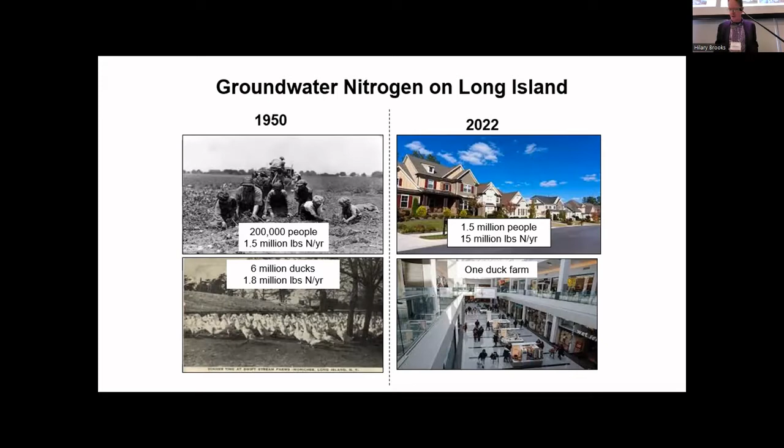But with people, it's a direct injection method through cesspools directly into our drinking water. You can see the bottom chart on the lower left, about half of the nitrogen that's reaching the watersheds is from the cesspool. Over on the right, it shows over the 30-year period up to 2017 dramatic increases in the nitrogen or nitrate concentrations in our upper glacial and Magothy aquifers, which doubled over that period.

The thing is that those are averages. There are places, if you read the Suffolk County Subwatersheds plan, that are getting 10 milligrams of nitrogen in water. Why is this important? 10 milligrams happens to be the EPA limit.

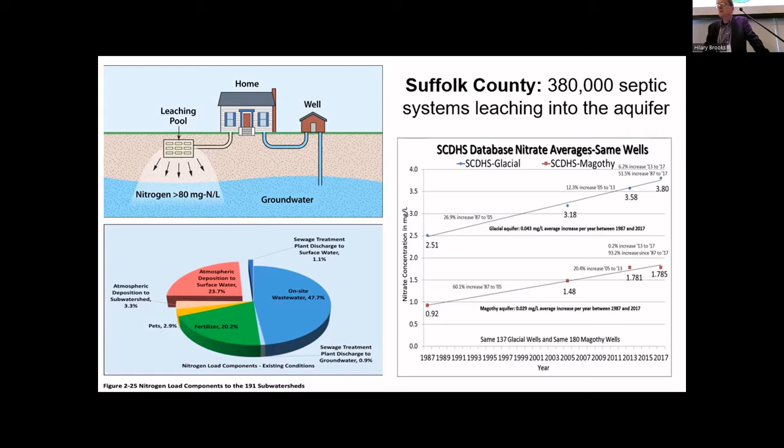But there have been a number, Chris and I were having a conversation about the other day, we thought 20 articles in the last two decades of epidemiological studies that correlate drinking water nitrate and serious illnesses like premature birth, colorectal cancers and other cancers. But the important thing is this is at 3 milligrams per liter, not 10.

And I'm sure just about everybody in this room also knows that when that nitrogen-rich groundwater discharges into lakes and estuaries, marine systems, there's a cascade of environmental problems.

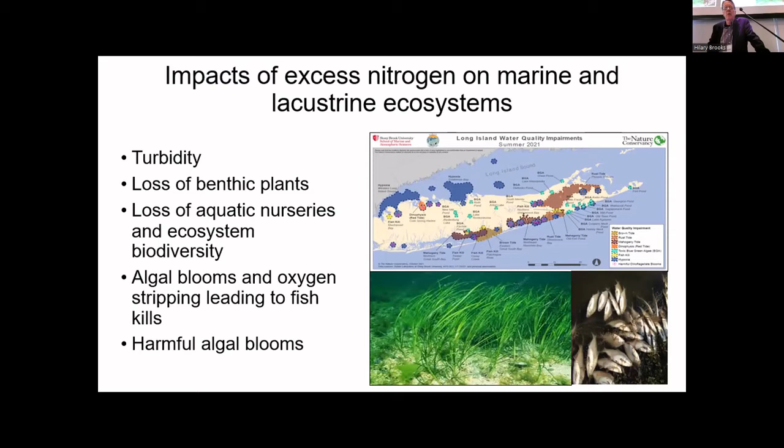Nitrate fertilizes the estuaries and the lakes, resulting in a turbid water column, which leads to a loss of light and loss of benthic plants, which provide nurseries for the ecosystem there, and that leads to a crash in biodiversity. Algal blooms strip the water of oxygen, nitrogen hits fish gills, and fish are facing the wrong way because they're dead. And harmful algal blooms, which Chris has studied over the last decades.

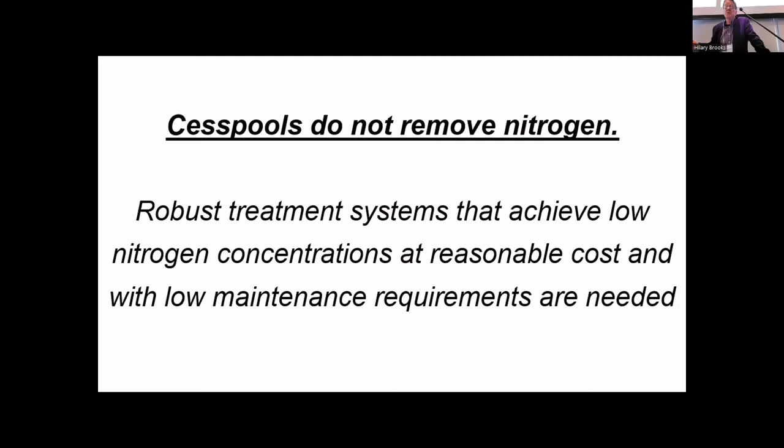So cesspools do not remove nitrogen. What is needed is robust systems that achieve low nitrogen concentrations at reasonable cost and without high maintenance requirements. At the center, all of our technologies revolve around the basic principle of coupled nitrification-denitrification.

Now, this occurs naturally in the environment. It occurs in sediments of continental shelves, estuaries, and it occurs in soils and forests. Basically, it's the coupling of the oxidized form of nitrogen, which is nitrate, which is then denitrified into basically air, into dinitrogen gas. Our systems just speed up that process happening.

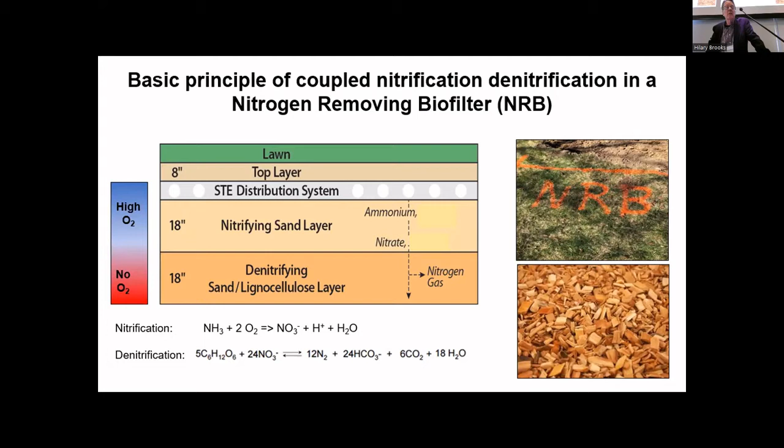So we deliver wastewater through a distribution system over underlined 18 inches of sand, which oxidizes the reduced forms of nitrogen into nitrate, and then in an anoxic layer, it's denitrified into air. There are basically three designs that we use. This one is the unlined NRB, and that one is direct final discharge into groundwater.

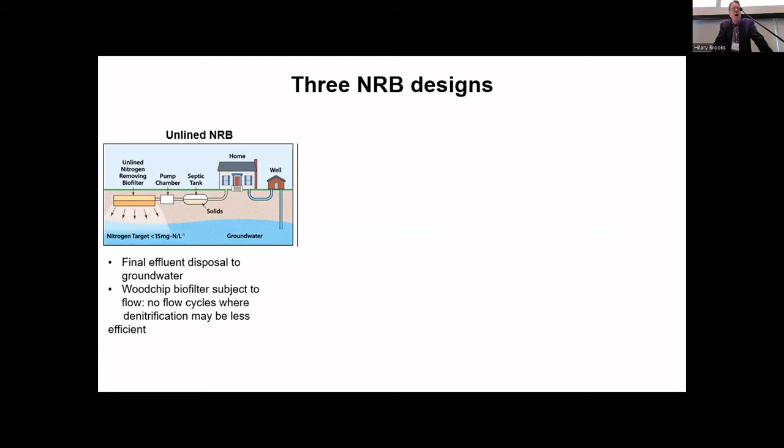Again, it works with a septic tank that is pumped into the drain field, 18 inches of sand, 18 inches of sand and wood chips. It's unlined, and so wood chips in this configuration are subject to cycles of wet and less wet. In that system, the wood chips aren't thoroughly anoxic all the time. For that one, we actually target final effluent nitrate of about 15 milligrams per liter.

The second system attempts to address this problem by putting a liner around the system and running a pipe from the bottom of the system. Wastewater is channeled up through that pipe to the interface between the sand and wood chips, and that creates a hydraulic head so that the wood chips remain continuously saturated and therefore anoxic, allowing better denitrification.

And the third design takes the sand portion, that is the nitrification oxidizing portion, and channels the water down into a wood chip box. In that box, there's a much greater volume of wood chips and much greater surface area of wood chips, so it really enhances the denitrification.

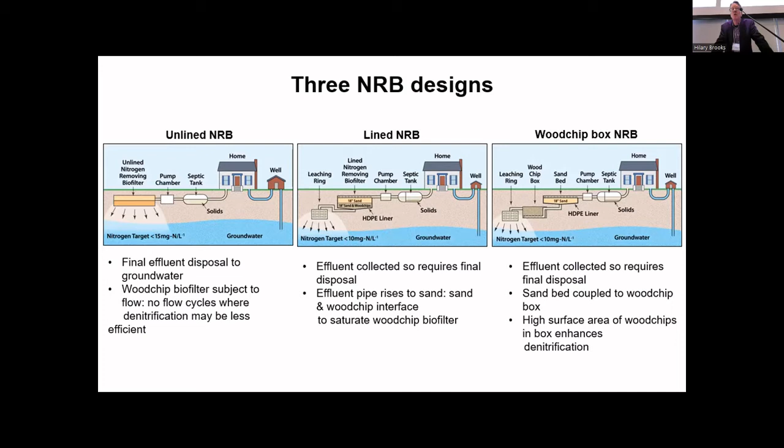Both of those second systems aim for 10 milligrams of nitrogen. How have they been doing? Well, to assess that, we decided to fast forward the tests for these systems, the Article 19 tests, and assume that the data at the end of last month was final.

What you can see is that the unlined systems get about 15.4. 5 out of 8 of those systems are getting better than 19 milligrams per liter. The second system, our lined system right now, averages 7.5. I expect that to drift up a little bit in the next few months. That's pretty good right now. 6 out of 8 of those are getting better than 19.

The wood chip box systems are getting 14. Now, that total nitrogen in final effluent is higher than lined, but it's because those three systems happen to have very high levels of nitrogen in the influent, about 120 to 135. So they're reducing about 87%, just about all of that. The other two are somewhat less efficient, but still handle up to about 100 for the lined.

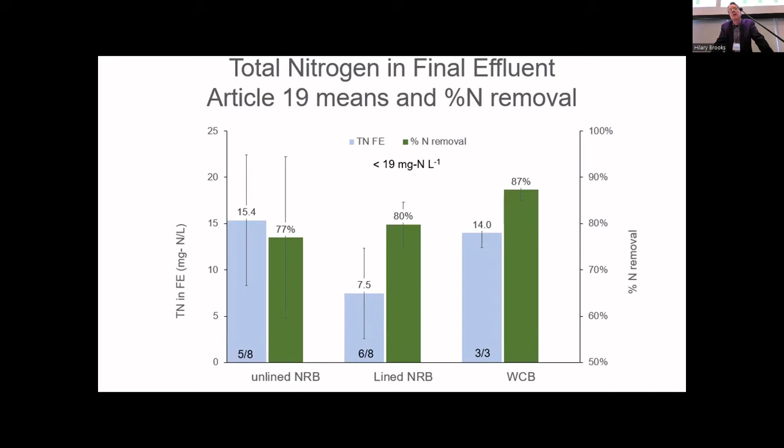So how do they compare against commercial systems? They're okay, they reduce nitrogen pretty well. But on-site wastewater contains more than nitrogen, it contains emerging contaminants.

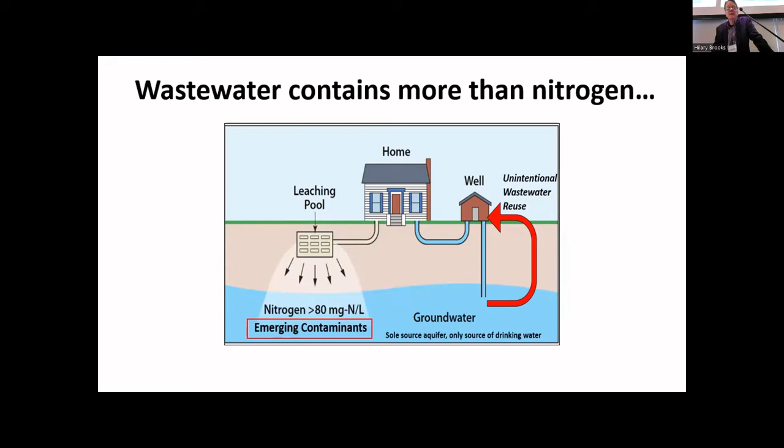Our drinking water team here at the center did a study over a year ago where we looked at how these systems remove 1,4-dioxane. They reduce it by about, in some cases, up to 8 times, down to less than the New York drinking water standard of 1 ppb.

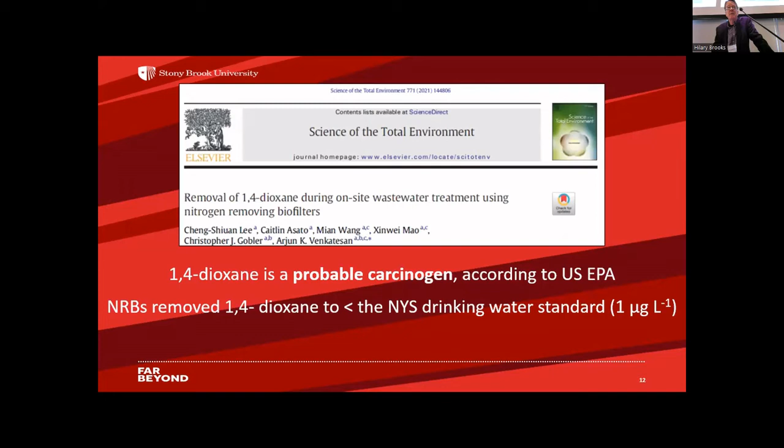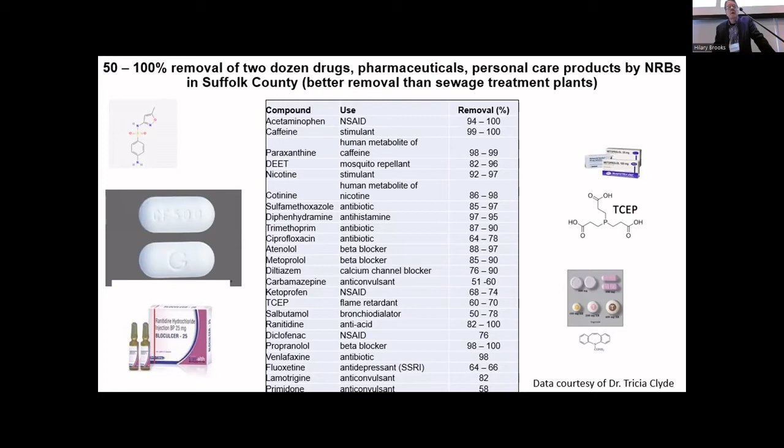Also another student here, Dr. Tricia Clyde, has since graduated, looked at a suite of pharmaceuticals and personal care products typical of on-site wastewater, and found reductions of 50 to 100%. We also, in Dr. Xinwei Mao's lab, looked at phosphorus in the last year in the effluent of these systems, and you can see there's pretty significant removal.

Now for both the PPCPs and phosphorus, these systems have been running, as you can see from the chart on the left, in some cases 3 years or more. So it's not adsorption into new soil that's taking out that phosphorus or organic compounds by ionic reactions. It's biological or abiotic reaction that's removing it.

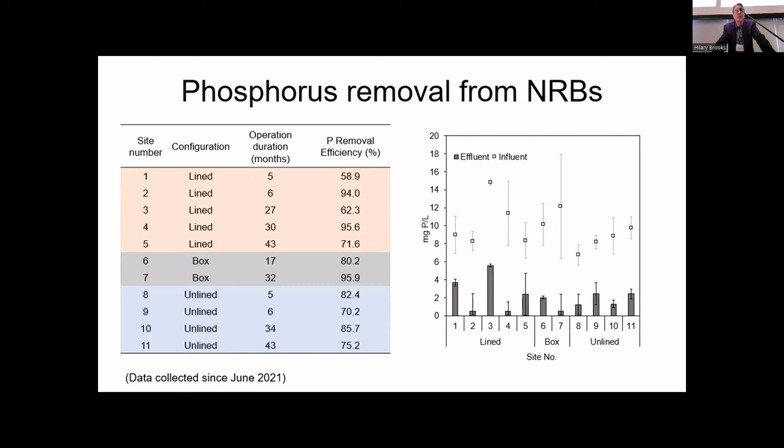As I alluded to earlier, we are in the pilot phase for the NRBs, and we have 8 of them now being tested for provisional. If everything goes right, we anticipate provisional acceptance in the first quarter next year. Same thing for the lined, and we need to install 3 more woodchip boxes to start the testing for provisional.

Going to provisional means that we will operate differently. Previously, in order to do installations, the center initiated them and we went out and got grants, water quality grants, federal grants to do that. But in the provisional phase, that would be a commercial transaction, hopefully with SIP grants for the homeowner. The homeowner will initiate the transaction. So that's a big change.

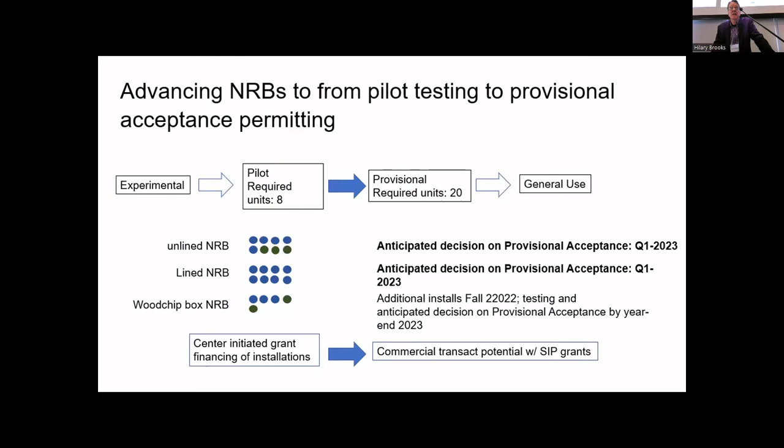I can't address the entire change here, but I'd like to bring up a couple of points. One question we often get from homeowners and prospective purchasers of these systems, installers of these systems, is carbon longevity, also the footprint, the cost of the system, and the installation time.

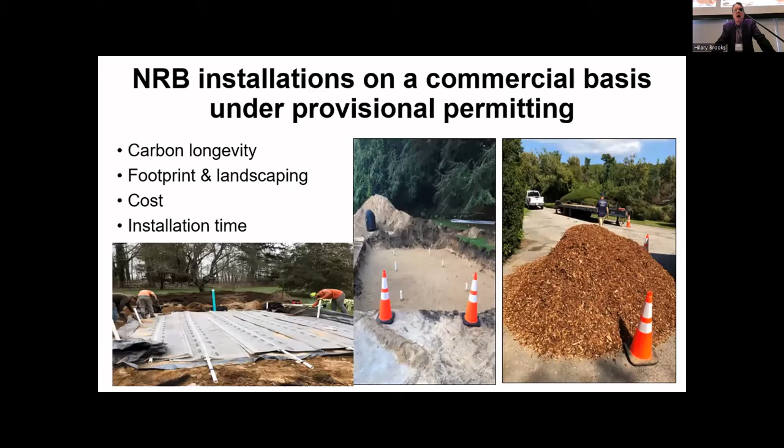So I'll address those. Some of the first people who installed these systems back in the 90s, these woodchip biofilters, in Waterloo in Canada, put them in the mid-90s, and those systems are still removing nitrogen. We have a system, an unlined system prototype up at Massachusetts Alternative Septic System Test Center, which has been running for about 6 years.

We did all kinds of tests on it, cranked up loading rates, and because of that its performance began to deteriorate from under 10 to about 14, 15. We decided, okay, we're going to excavate it and take a look at a lot of things. We're hoping to get some papers out of that work.

We processed that, and we put soil and wood chips from that into 2 different treatments: one, barrels that were unsaturated, just dosing and the water drained right out, and barrels that were saturated. What we found was that wood chips worked even better than when we started in the saturated, but they didn't in the unsaturated.

So this points to the fact that wood chips are fine, they last, that's not an issue. The thing is, this one system had been subject to higher loading than it should have. We did that as an experiment, and that can compromise the system and lead to air intrusion and oxygen intrusion. That you can't do.

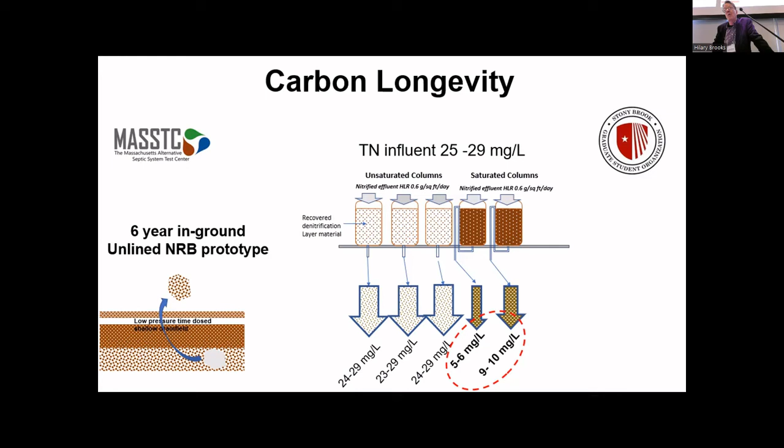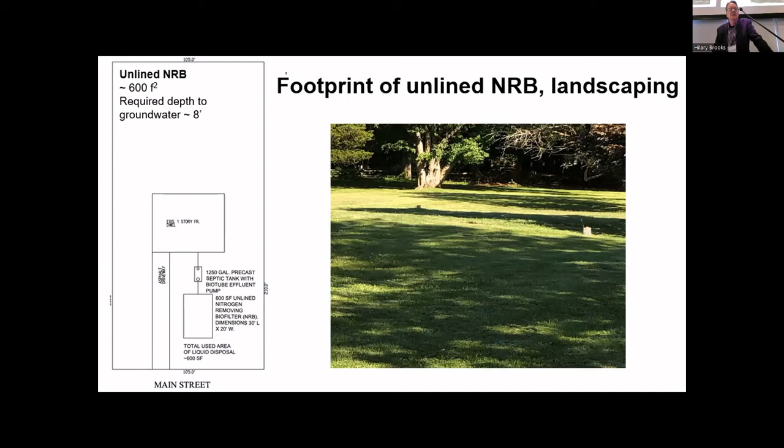So, footprint. This is a system on an unlined NRB on a half-acre lot. There's a house, a driveway, and 600 square feet of drain field. This is a picture of one of them. You can see it doesn't affect the lawn at all. You do need to put in some posts or rocks to keep tractors or heavy equipment off of it. But that 600 square feet is only 3.5% of that half-acre plot.

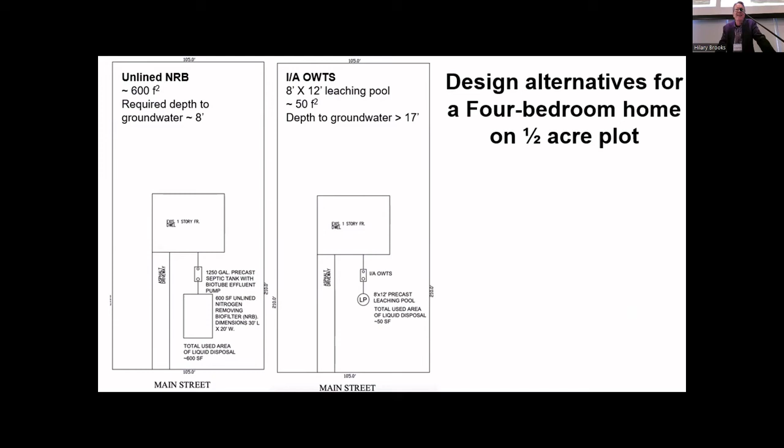It's not that much. Of course, you can save space if you need to by putting in an IA with just one leaching pool, but you can only get that if you have a depth of groundwater greater than 17 feet. The unlined NRB only takes 7 to 8 feet. If you get to lower, more shallow groundwater, you have to put in systems that take up more space. For instance, an IA system with 3 leaching galleys for groundwater depth less than 9 feet takes up about 140 square feet. And if you have to put in a graveless absorption bed, that's almost as big as the unlined system.

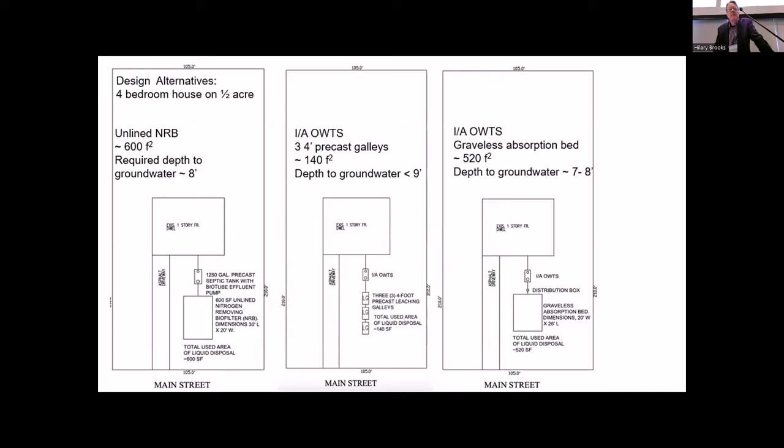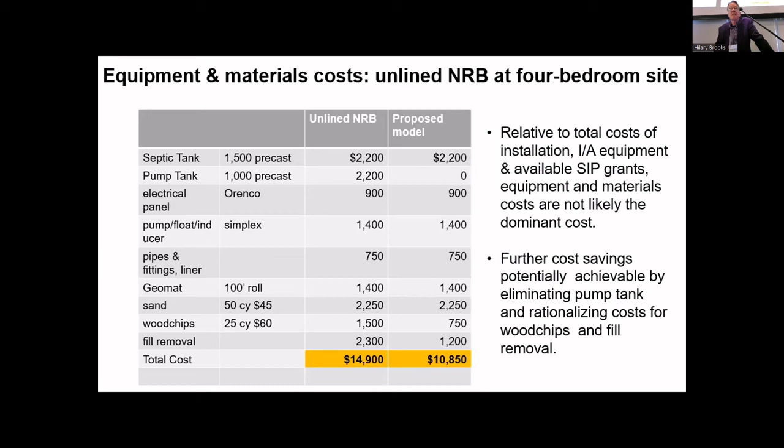Costs. We think there's some gains. We put in some systems, and I think we can improve and lower the cost. We can do it without a pump chamber, putting a biotube directly into the clarified part of the septic tank. We also think we can do a better job with woodchips and fill. As for installation time, an IA system takes about a day and a half to 2 days. An unlined NRB takes about 2 to 2.5 days, and lined woodchip systems take longer because you've got to put in a liner and arrange final disposal.

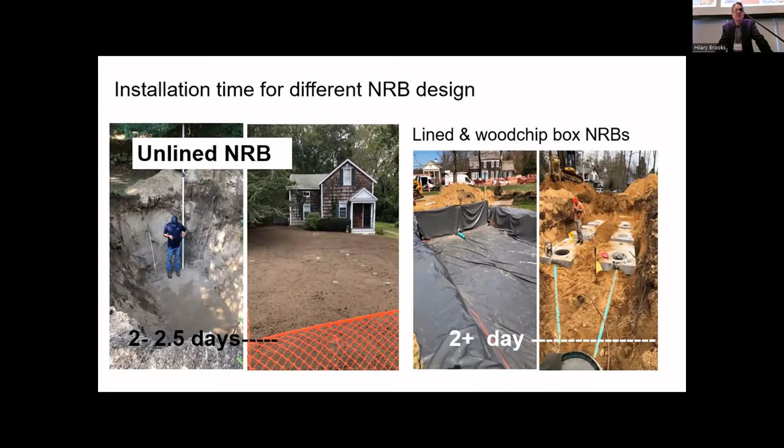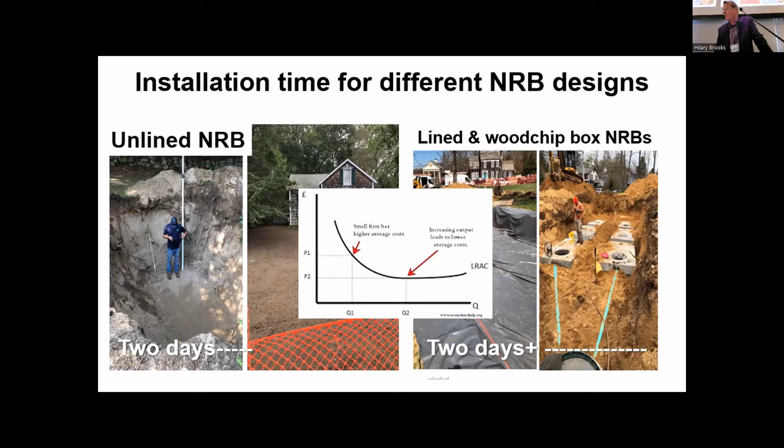This chart in the middle is just a classic economics 101 efficiency curve. Your unit cost goes down the more units you produce. Calculators used to be expensive in the 1980s. Teslas started out expensive and have gotten cheaper. There's this principle about lowering unit costs as you increase volume, and that's what I keep telling our installers. If they follow the path of Gordon Moore or Elon Musk, they should consider that chart.

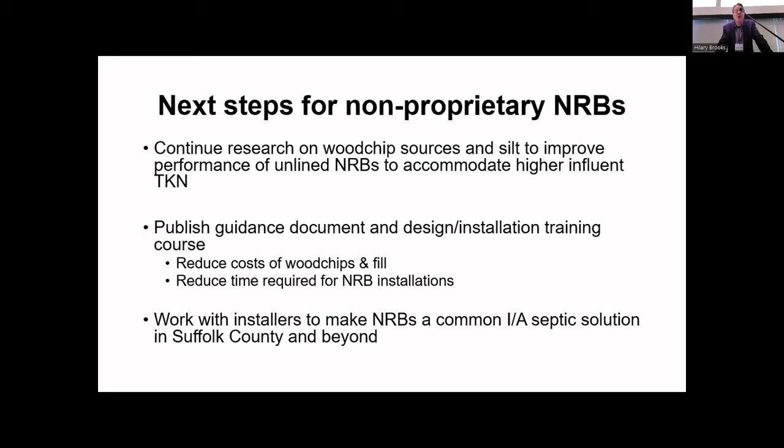So next steps for us: continued research on woodchips and materials that can improve unlined system performance a bit, publish a guidance document and design/installation training course, and work with installers to make NRBs a common IA septic solution. I want to mention one more idea here, because I don't want anything I've said to make you think IAs aren't good.

There are a lot of really good IAs out there, but they can be even better. Just about all of them have aeration, which means they nitrify very well. And if you look at the composition of nitrogen in their final effluent, it is mostly nitrate. So say an IA is doing very well, getting 12 milligrams per liter of nitrogen in its final effluent — 10 of that might be nitrate, 2 might be organic form. Well, we have proved that woodchip boxes get 80 to 90% removal of nitrate. So if you attach a woodchip biofilter to the back end of an IA system, you can reduce that 10 down to say 1 or 2, giving you a total nitrogen final effluent of 3 or 4.

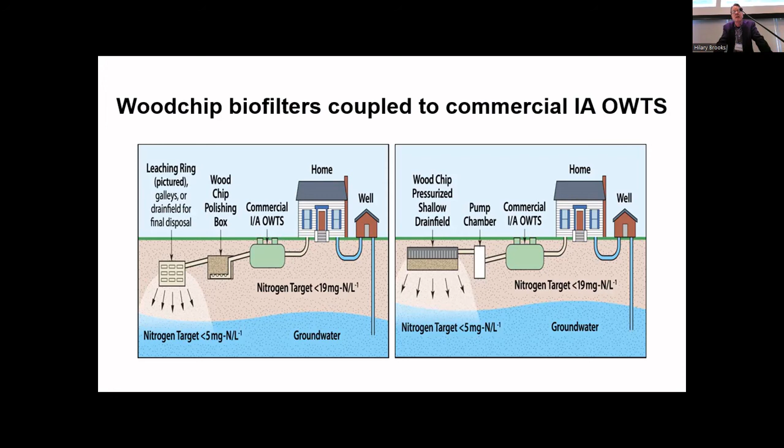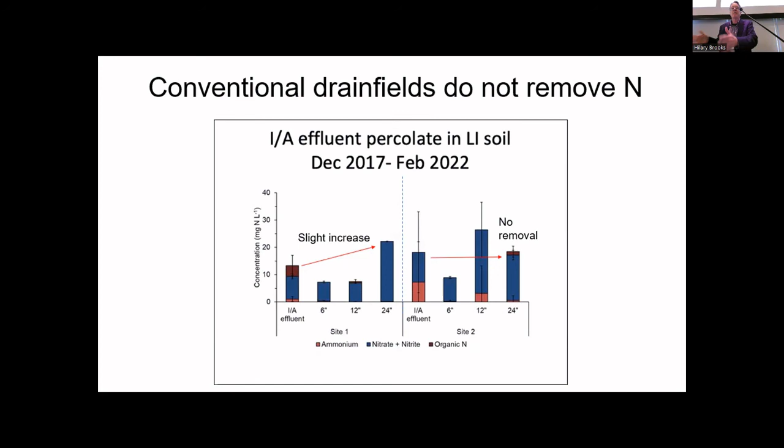So there are 2 models that we've come up with. One is just a woodchip box system, like the one attached to this sand filter. The other is a PSD with woodchips. The reason we designed that is this: for the last 5 years we've looked at several PSDs in Long Island, and they don't remove nitrogen. The idea of a PSD is it's a pressurized system that sits above natural soil, but that natural soil isn't removing nitrogen — probably because the perc rates here in Long Island are too high. So if you put sand and woodchips in there instead, you've got a really good chance of removing almost all of that nitrogen.

So thank you very much for your attention. And with that, I'm going to turn this over to Xinwei Mao, who's going to discuss the next gen systems.